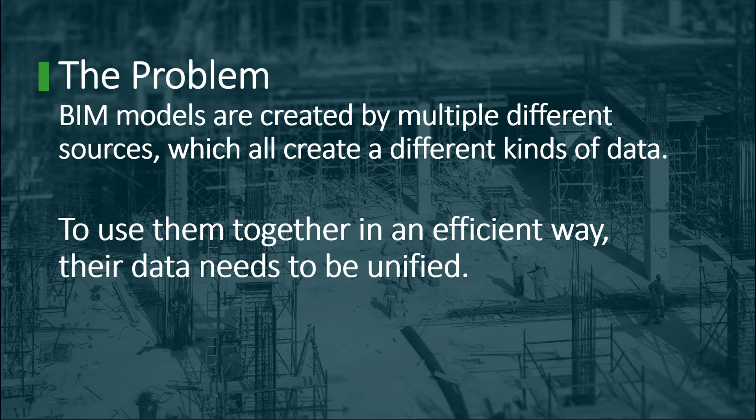It takes open BIM IFC models and it transforms the data or wrangles the data or modifies the data, whatever you want to call it, so that it fits different kinds of purposes. I'm sure you all have different uses for BIM and BIM data, and there's many ways Simplebim can help in that. That's the general idea. We come back to the details of the features and use cases a little bit later, but first let me just show you the basic workflow.

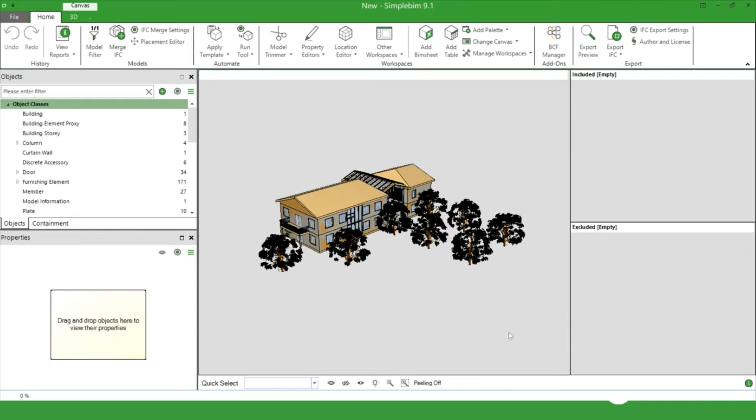Great, so here I have Simplebim already opened, and the basic workflow is that you import an IFC model to Simplebim. In this case, it's a simple architectural sample model, but it could be from any discipline. It could be a structural model, HVAC model, MEP, electrical, whatever. And sure, you can view and get to know the data and the model, just like in any viewer.

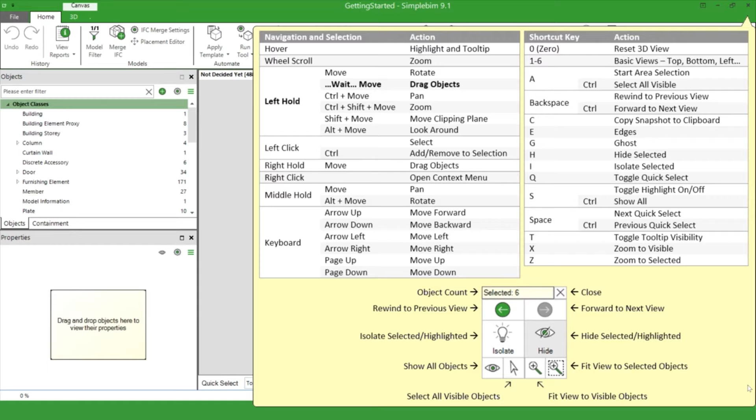If you want to know more about the basic viewing and editing, there's a lot of tutorials available on our YouTube channel and on our support site. I will show you later. And some tips for the 3D can be found here in the lower right corner. So I won't go into those details right now, but let's look at the basic workflow.

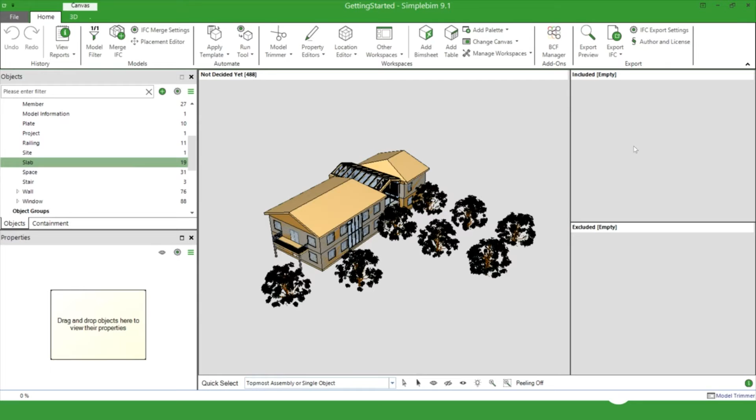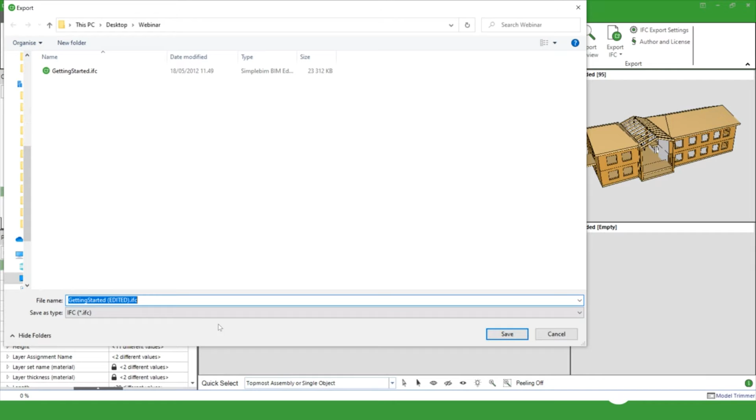So you import the model and you could do different kinds of things, which I will go through in a minute. But for example, you could select some objects from the model simply by drag and dropping. And maybe this is all you want to do, sort of clean up the model. And then you would export it back to IFC. And that's it. That could already add you some or even a lot of value.

And then you would take that model back to some other BIM software or just extract the data to Excel or data sets. All those edits you've done, in this case I just trimmed the model, but I could do a lot of other things, all those edits would be included in the IFC model. So this is the open workflow: you import, you do things to the model to make it better, and then you export it back to IFC.

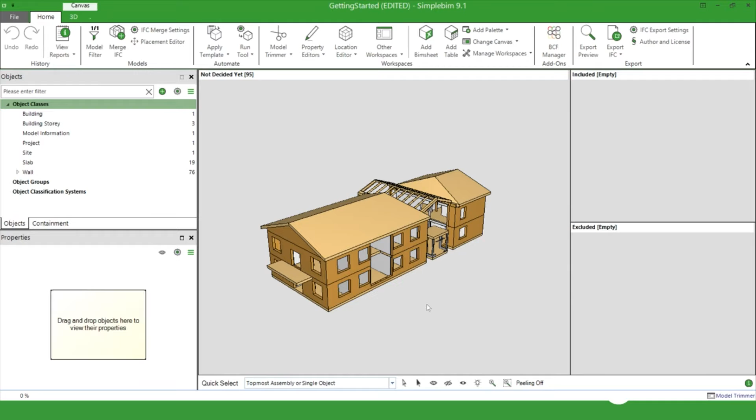Yeah, so what else can you do? There's a lot of things you can do with Simplebim, and you can start small, or your use case could be something relatively simple, like we have customers who are site surveyors. They just basically do what I just did.

They take a structural model, they choose some objects from it, export it back to IFC, maybe manage some of the data so that it works better in their site computer, and then they upload the edited IFC model to their site computer, and it's much more valuable to use on the site and with the total stations or whatever they call it.

Or you could be a construction company managing models from over 100 projects per year, like some of our customers are, and run these different things, transform the data in different ways on a weekly basis, or even in some cases on a daily basis from all the different disciplines. And you know, there's simple cases, and you can take steps to go very far if that's what you need.

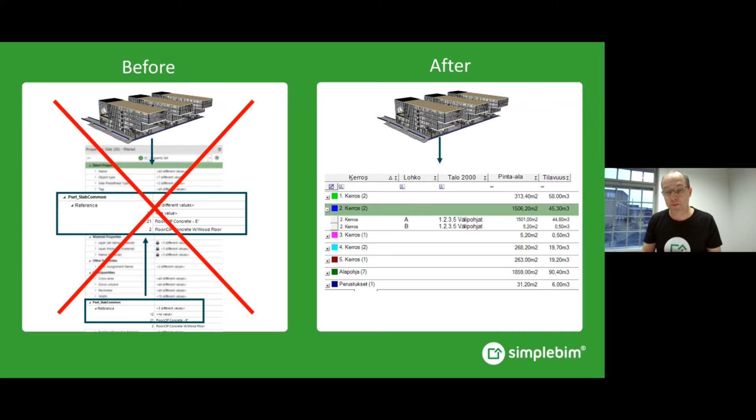Their semantics is something most of the people can't even understand, and the data is here and there mixed up in different models. And after you make it consistent with Simplebim, you can add your own property sets. You can make the semantics of the property names such that everybody can understand, not just the BIM or data savvy people, but everybody.

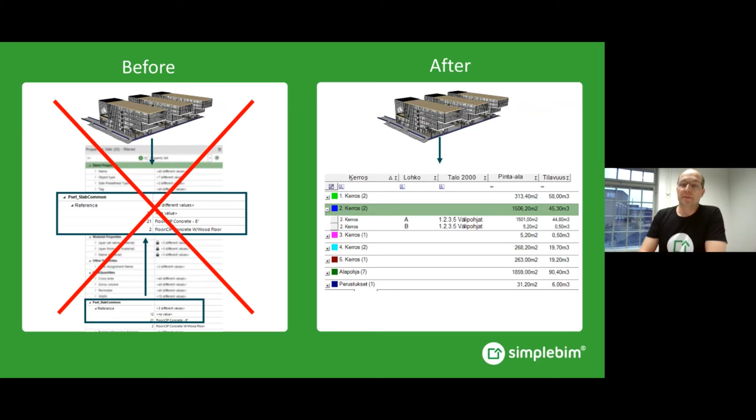So the data is easy to understand, and it's always the same, no matter where the model comes from, which model or tool, which disciplines, in which project. It's always the same. And yeah, that's what Simplebim enables you to do.

Well, as we showed in the basic workflow, you can clean up the model in different ways. You can just select objects, you can select properties or filter them out. And Simplebim compresses the models, makes the file size smaller, and there's even these sort of innovative ways to reduce the file size even further.

Because even though we have all this cloud computing power and all this storage and everything, it's never a wise idea to store unnecessary data, which can cause unnecessary issues. So it's better to focus on the data you actually need, and there's very nice ways in Simplebim to manage data that way.

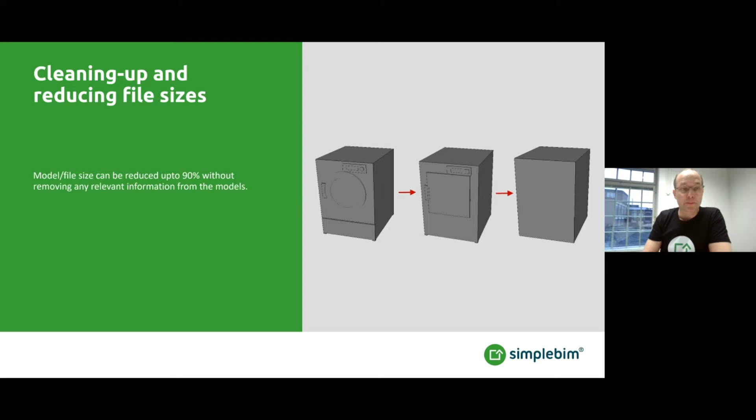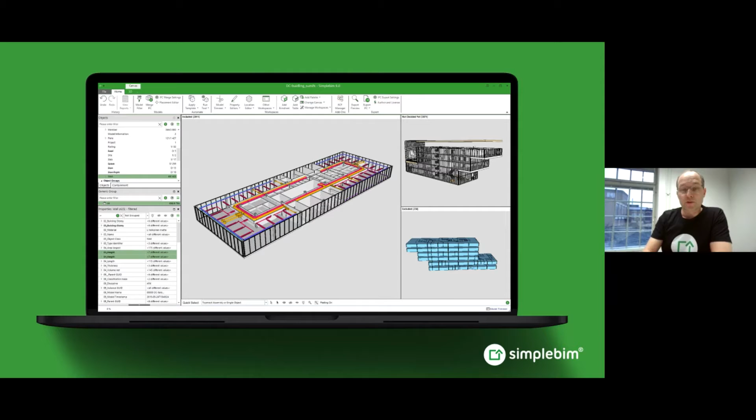You can merge models together. Here we have some architectural, some structural, and some HVAC models merged together. And the big idea is that you take those models together and you don't just overlay them on top of each other, but you actually merge the data so that you can create another IFC model from those federated models, which then can be again used downstream for different purposes.

Grouping and classification, this doesn't come from the designers. Every use case has its own way to organize the data, and Simplebim has very powerful tools to either manually in the UI or automatically with rules organize the data in different ways.

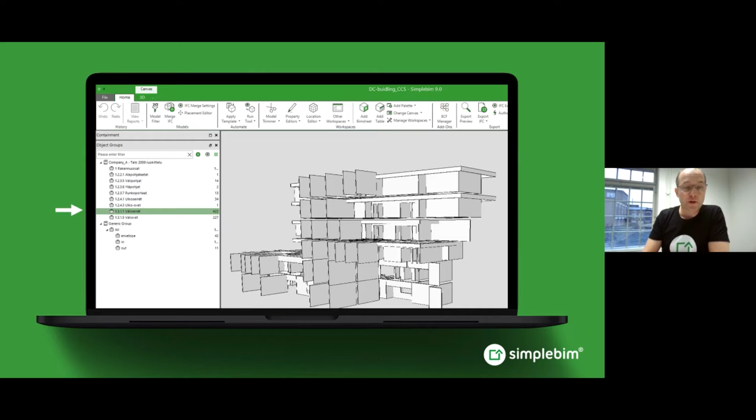Here in the picture, there's a Finnish national classification system, but it doesn't even have to be anything that complex. It can be another national classification system from your country, but it could be something much simpler. Like the model simply classified based on the types of, I don't know, precast walls or whatever, if you're doing tendering for a precast factory.

Quantities, everything in construction is basically based on quantities, and BIM for sure is a very powerful way to measure things from the designs. But the one issue we have is that all the modeling tools do it a little bit differently. But if you use Simplebim, we have our own quantity takeoff calculation engine, which uses the geometry. So no matter where the model comes from, there's always the same logic applied, and the calculation results are always consistent and comparable.

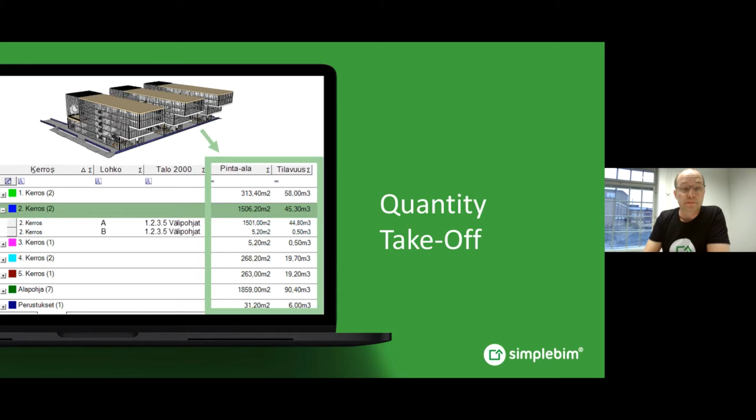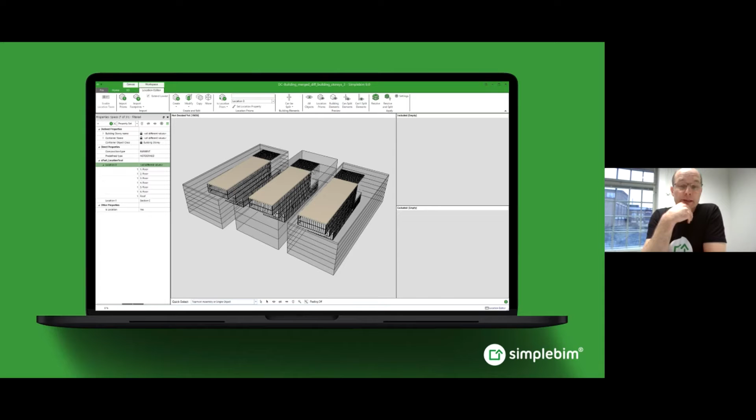One of the most interesting things in Simplebim is how you can organize the models by defining different levels of locations to the data. So you do it with these sort of volumetric objects, and there can be different levels. It can be a building, it can be a section, a building story, but it can even be an apartment or a takt area or even a room. And you define these locations, and then you can apply it to all the disciplines' models, which then means that all of them have the same information if you want to use them together.

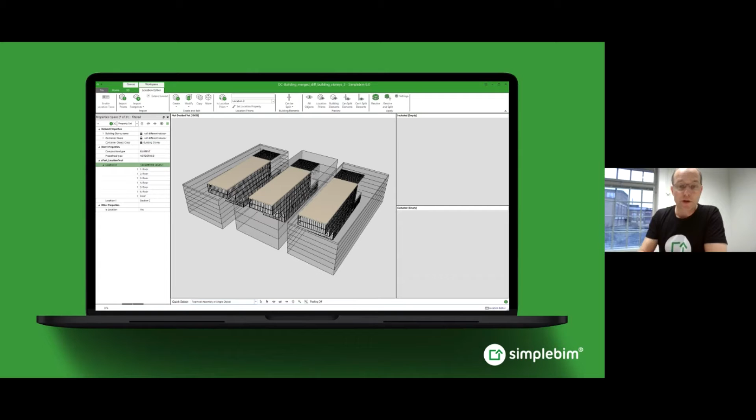I'll show you in a minute, well, in this example, there's one room from the federated model, where all the objects have this location information applied with those same prisms or location volumes, whatever you call them. And afterwards, you could make this kind of view.

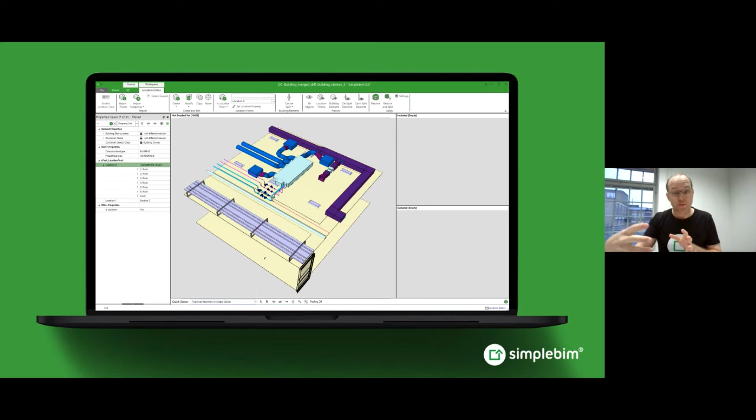You could organize the model based on the rules and make your bill of quantities or bill of materials to support your production planning or procurement or logistics or on-site management, whatever, based on that information. And all the models from all the different disciplines can have this same information, and it can all be applied to the models in a very automated and innovative way.

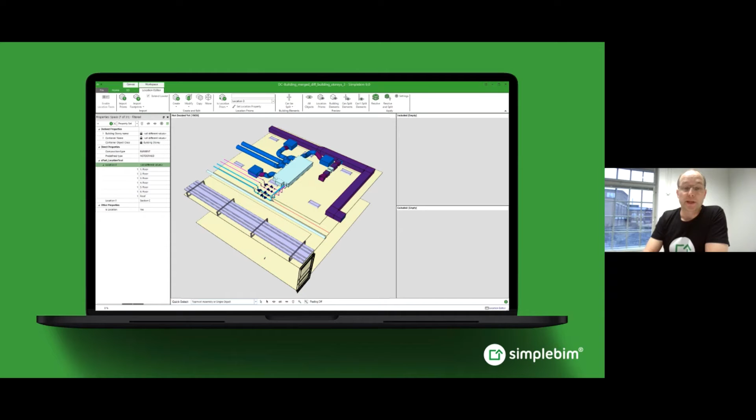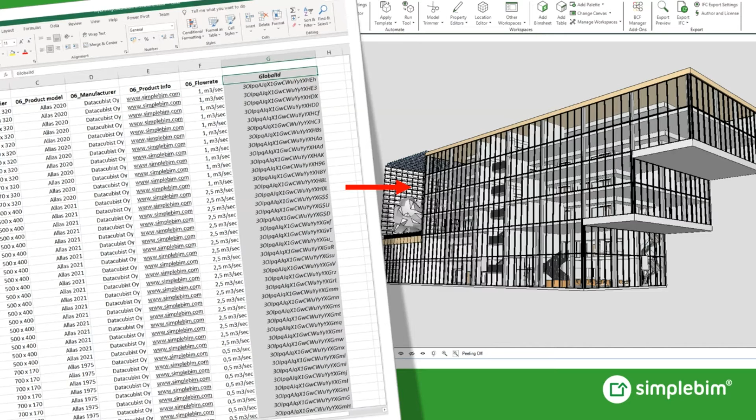You can enrich the models in different ways. Maybe you have product data in a table format. You could merge that to the objects. Or we have this tool called Bimsheet, which you could use in a way that you take data out of the model, extract it to Excel, and then somebody else takes that Excel and adds data to it, modifies the data maybe, and then you can bring it back to Simplebim and merge that added data to the model, export it back to IFC, and then you have an enriched model in your hand.

You can even go further and derive new objects and data to the model. Here's a few examples of that, like this duct penetration or electrical penetrations. On the site while you're building, you need to go through different kinds of structures, whether it's an internal wall or whatever, and there can be thousands of these in a commercial project, and it's a really hard thing to manage, hard to plan, hard to estimate, and hard to manage on the site.

But with Simplebim, you could take the architectural model, you could take the cooling system or air conditioning system model, and then you clash them together, not to make a design coordination, but to create these new objects. And Simplebim will create these new objects out of the clash. You can see here in the picture, and that would become its own object. And it can inherit data from the wall, for example.

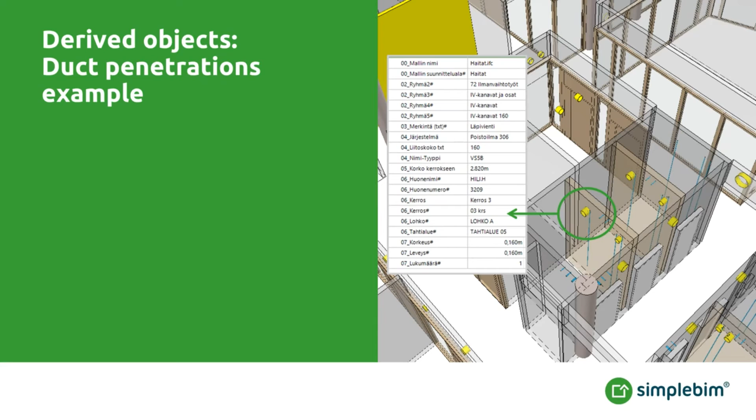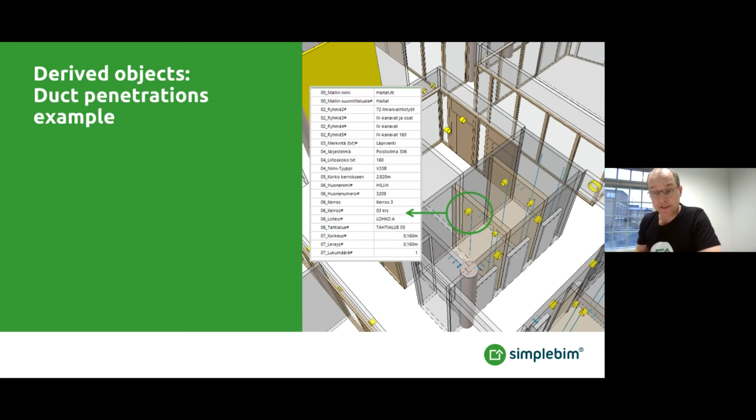What kind of wall is it? What's its fire rating, acoustic ratings, what's its type? Because depending on what kind it is, the work costs a different amount, and you need to use different kinds of equipment. It can also inherit data from the actual duct, for example. What system is it part of, what is its size, where it is located, which section, building story, apartment, takt area, even room. And then you can do these data listings to support those plannings and monitorings and tendering and procurement and logistics for these things.

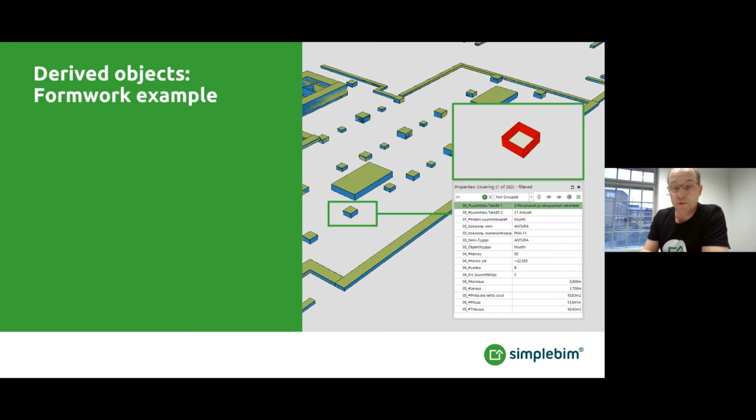Same kind of things. Here there's a structural model, and you can apply these formwork objects. There's a new object. It can inherit data, again, quantities, locations, identification, classification, from the original objects, and then you can export it back to IFC or to Excel or to some data sets and use it in your downstream.

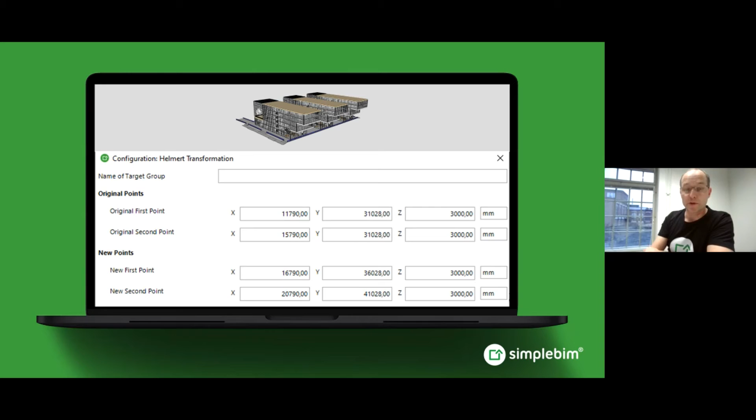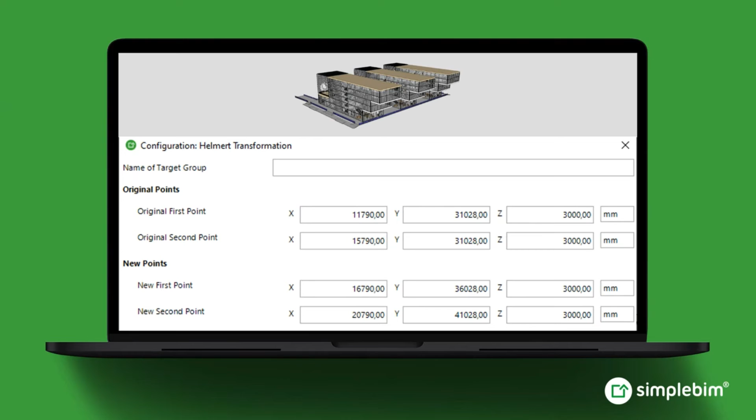You can move and rotate objects or whole models. Maybe you are a site surveyor and you need to place the model into the site coordinate system, or maybe it's a BIM manager who needs to coordinate the models so that when you federate or merge them together, they are placed in the same place. Simplebim is probably the only solution which has the Helmert transformation. So whenever we do something, we have very detailed discussions with the customers and find out what they actually need and go into practical details to create these tools.

Okay, and you can export everything, all those operations you can do, all this data wrangling or transformation, editing, and you can export that back to IFC, but you can also export it to Excel or even to some data sets and use it in some BI system like Power BI or whatever.

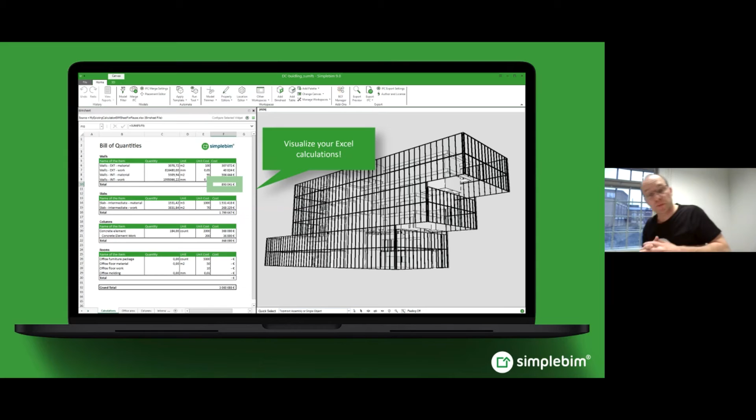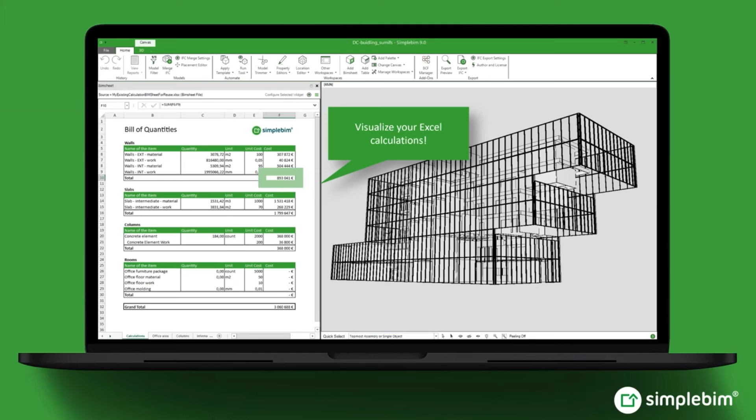And the Bimsheet is our invention, how to connect Excel to the models, which is a very nice way to use Simplebim in a simple way. You just connect your Excel calculation to the model data, and you can even visualize your calculations. Take your cost estimate and see which objects are related to that, and make your bill of quantities or bill of materials in this simple way. Many people are still using Excel, and this is a really nice way of connecting those calculations to the model data. And there are various different kinds of things you can do to the models.

IFC has some issues which can be fixed. You don't have to abandon IFC because not all the implementations are 100% error-free. There are some small issues there. Simplebim can fix them, and you can use the data.

You can validate data. We're not talking about the design coordination here or clash detection as such, but the actual data. Are the data missing you need? Are the values as you expected, and so on? And of course, you can colorize the models, and all this can always go back to the IFC and be used in the downstream.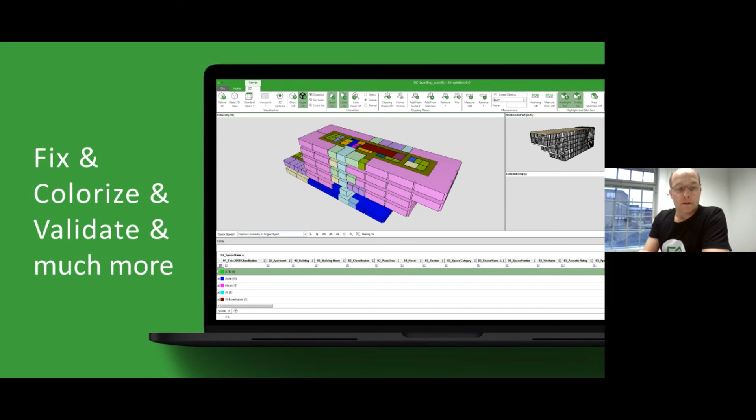So all this and even actually much more can be done with Simplebim. Hopefully this gave you some idea of the possibilities and got you excited to try it more. And all this can also be done automatically. So we have what we call templates, like these rule sets, which you can apply to the models.

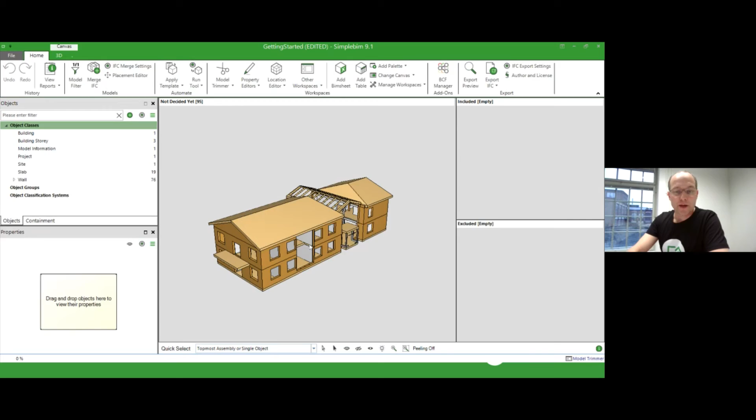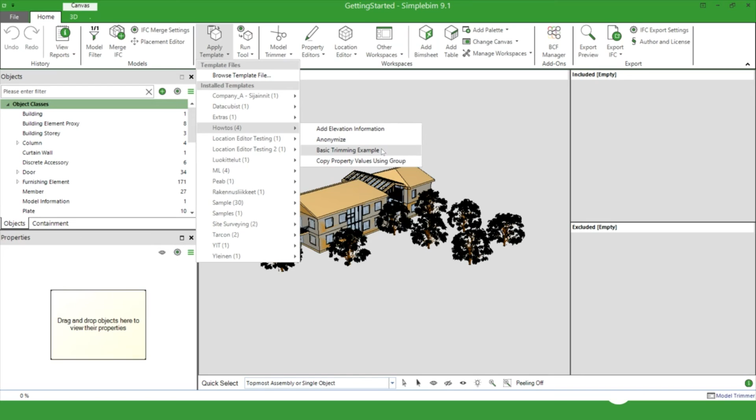Let me show you quickly. So if I go back to my original model, there is Simplebim. Instead of manually, with human interaction, drag and dropping things, if I know what I'm doing, I can simply run this sort of template, which is basically a rule set, and do the same thing. So automatically it found the same objects as I did manually in the beginning. And basically everything I just listed and went through, all the functionalities can be made automatic.

You can even do some batch processing. We have a scripting system, which you can find more information about from our support site. And there's an upcoming new solution we call Simplebim Cloud. If you're interested in that one, please contact us. It takes the automation even further and runs these rules in the cloud environment, but that's another story.

Yeah, so we're almost done. Why does this matter? Why would you need to wrangle the data? Well, the first thing is that the environment where we are working is simply like that. The data is different when it comes from different sources. So just like in any other industry, you need to manage the data in order to get value out of it. And if you do it properly, it doesn't matter if your use case is something simple or if you're a construction company BIM team trying to manage hundreds or tens of thousands of models per year in a very complex way.